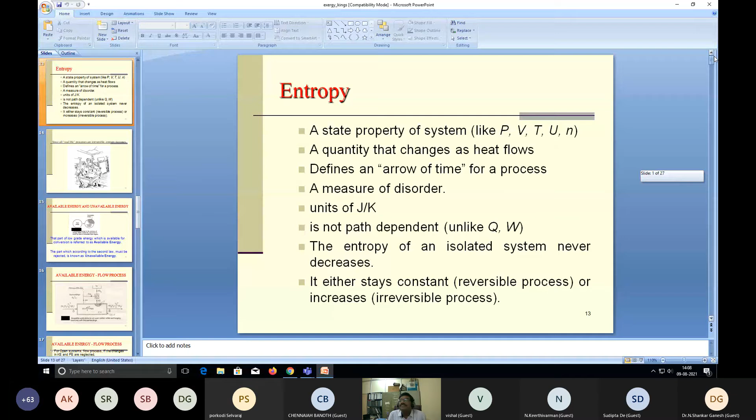Let's proceed. The topic is the fundamentals of Exergy and its role in thermal design and optimization. This was the topic given by the organizers, and I tried my level best to modify this lecture to suit your requirements and to continue for further lectures given by other speakers from day 2 onwards, since most teachers from the second day onwards will give inputs related to how it has to be applied for different practical applications—power cycles, refrigeration cycles, thermodynamic systems, equipment, and so on. For all these components, second law analysis has to be incorporated so that optimization and design will be better.

So the contents of the present lecture will go this way. Initially, I will discuss what a thermodynamic model is—all the speakers in the next 5 days will be discussing this thermodynamic model only. I'll try to show where Exergy analysis fits in and how it has to be taken into account for the analysis. Then I'll start with the limitations of the first law, and before going to the second law, how Exergy came into existence for understanding. Then what is the quality of energy, and what is the need to understand this quality.

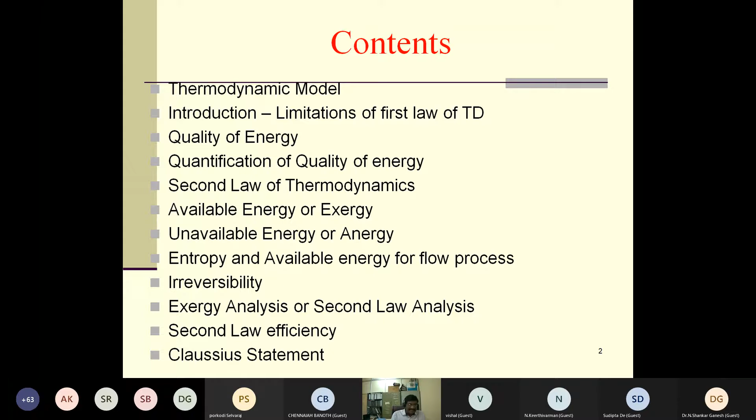Now we come to the thermodynamic analysis or thermodynamic model of power cycles. Whenever you want to analyze, design, or study any thermal system—gas turbine power plants, steam turbine power plants, internal combustion engines, and other power generating systems—for the time being, let us not discuss power consuming devices, and let us focus mainly on power generating devices. All these power generating devices work based on power cycles, as you might know.

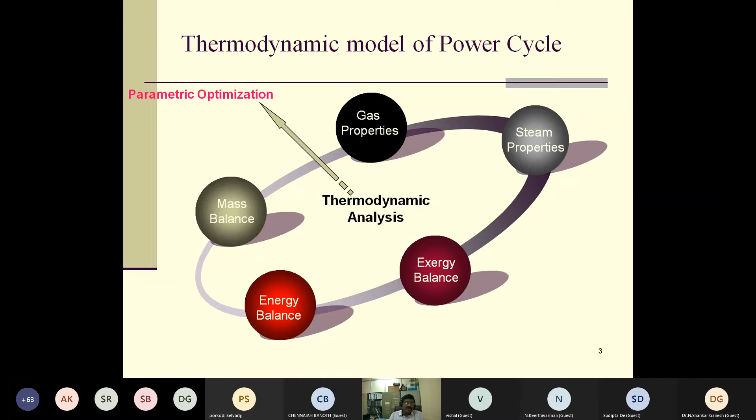Then you can do your parametric optimization either for combined cycles or different triple power cycles, tri-generation systems, or any new advanced topics like gasification process or clean coal technologies. A lot of thermodynamic cycles are nowadays available which are to be optimized and made practically implementable for the future power generation industry. With this intention, I'll try to start my lecture.

Let me give a brief introduction before going to exergy. I don't want to completely discuss the basics of thermodynamics, since whoever the participants are, majority already might be knowing the basics of thermodynamics and the first law. I will start my lecture from the basis of the first law and its limitations, how to overcome these limitations, how the second law can be applicable, and its importance. Finally, I would like to touch upon entropy generation and how it is useful for making second law analysis, and so on. I will try to extend this for today's lecture.

Let me take the introduction. I will give the statement of the first law of thermodynamics, which you might have already studied.

The first law of thermodynamics states that energy can neither be created nor be destroyed, but it can be transformed from one form to another. Because energy transformation exists, and because we need to make energy transformations according to the requirements of our practical applications, this thermal engineering has come into existence.

You need to study about all thermal equipment. If energy conversion is not necessary, you don't require this thermal equipment. So since energy conversion is required, when you try to convert energy from one form to another, the first law plays a vital role.

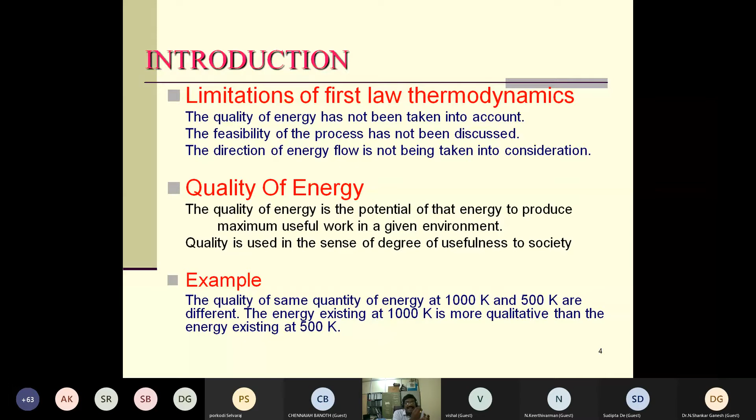Now let me check the quality of energy. We try to conduct a small test for the energy sources from where you are getting that energy, and we will try to see how much capability of transformation it has, for testing.

I am connecting the energy sources to a reversible heat engine. Why a reversible heat engine? Basically all reversible heat engines have the maximum efficiency, and also all reversible heat engines have equal efficiency for the given temperature limits. This is the statement given by Carnot, and based on that, reversible heat engines will definitely give the better or maximum work output.

From the first energy source, you know the equation for calculating reversible work for any reversible heat engine, which is Q1 into 1 minus T2 by T1. This is a standard equation known to all of you, where T2 is the sink temperature and T1... Q1 is the heat tapped from the source. Now, if you give inputs to this equation from the first energy source, if you tap 1000 kilojoules of energy, you get 700 kilojoules of work.

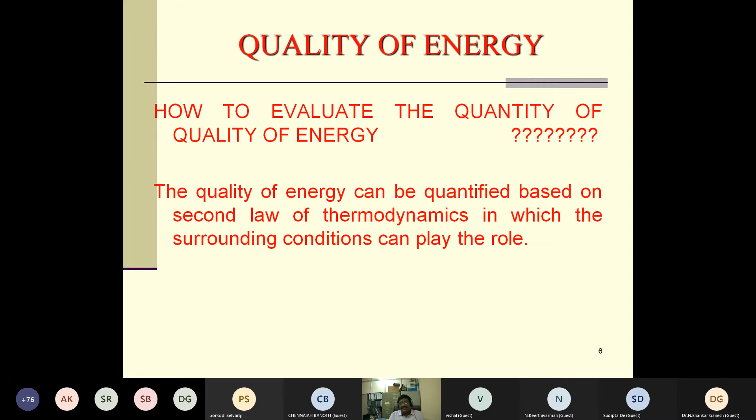The quality of energy can be quantified based on the second law of thermodynamics, in which the surrounding conditions will play the role. The environment and surrounding condition will play the role, and the second law of thermodynamics will come into existence.

Now first I will try to discuss briefly about the second law, then how it can be linked to your quality. The second law of thermodynamics basically considers the following points: it recognizes the quality of energy.

Even the same quantity of heat at different temperatures will have different qualities. There is a gradation between types of energies. It will help us to grade based on direction of energy transfer and conversion capacity. Energies can be graded.

It is also called the law of degradation of energy, since practical processes result in degradation of energy. Slowly, as the processes go on, the quality of energy will be degraded.

It also introduces the concept of entropy. The entropy has been brought from the second law. However, it was being discussed before the first law, but they did not know that was entropy.

When you come to the first law of thermodynamics, we know that energy transformations are of two forms from a thermodynamic point of view: work transfer and heat transfer. For drawing on the PV diagram, for work transfer, integral PdV will be the work transfer, and for getting the heat transfer, integral T dx. X has been given as an unknown parameter as long as we discussed about the first law of thermodynamics.

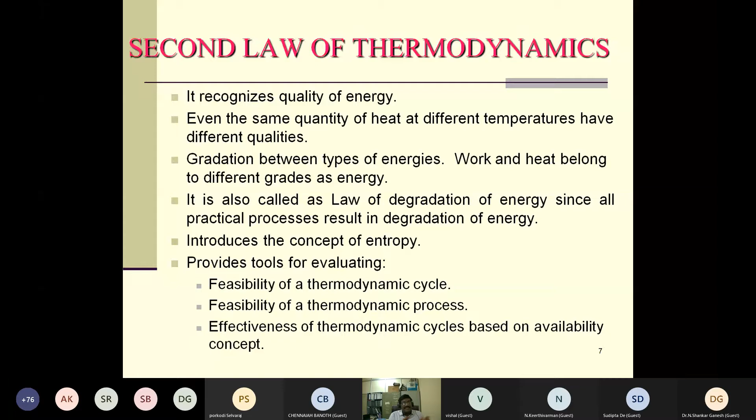But after the second law of thermodynamics, people got the importance of the second law and entropy, and that has got its own prominence, and it has been introduced into our content. Now we will say the second law of thermodynamics, what does it say?

It has been given in two statements: one is the Kelvin-Planck statement, the other is the Clausius statement. The Kelvin-Planck statement says it is impossible to construct a heat engine operating in a cycle to produce shaft work by exchanging heat with a single thermal reservoir.

So we may not be in a position to construct a heat engine which can generate work, because heat engines are generally used for converting heat energy into mechanical work. While converting with a single reservoir, it is impossible.

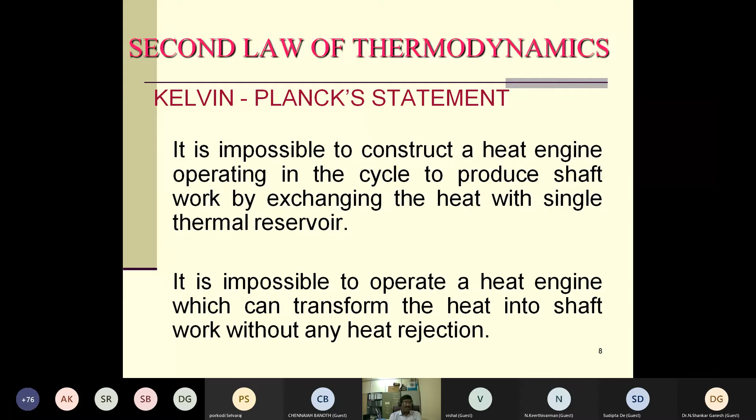You have to have one reservoir for heat tapping and one reservoir for heat rejection. In other words, it can be said that it is impossible to operate a heat engine which can transform heat into shaft work without any heat rejection. Such a fictitious machine cannot be made.

So here I have given the same Kelvin-Planck statement in the heat engine form. Here you can see the reversible heat engine. It is having better efficiency, and the source temperature is being taken as T or any other temperature.

I try to tap 1000 kilojoules of energy and connect it to a reversible heat engine. If you are able to convert this 1000 kilojoules into 1000 kilojoules of work, complete conversion, in this case the quantity of heat rejection is 0. That means this is the Kelvin-Planck statement which is impossible to construct.

The violation of the Kelvin-Planck statement would become PMM2, that is the perpetual motion machine of kind 2. That means without heat rejection, it is impossible to construct a heat engine which can transform heat energy into mechanical work 100%, which is practically impossible.

Now we may be getting the doubt: what is the link between this quality of energy and the second law of thermodynamics, or the Kelvin-Planck statement? How can this Kelvin-Planck statement take into account the quality of energy? I will try to go back to the engines shown here earlier.

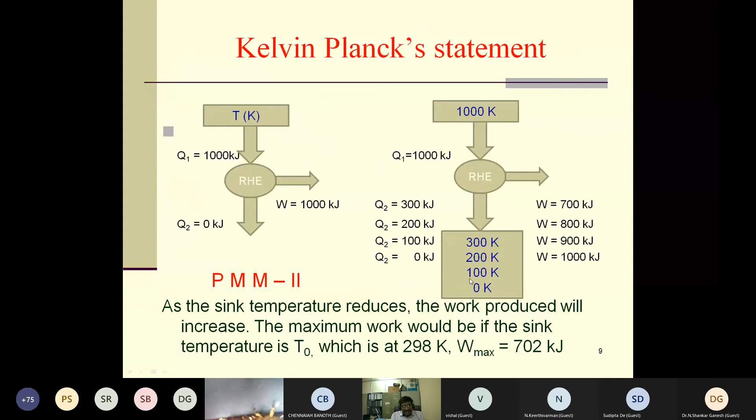It is a reversible heat engine. Whatever maximum work output you get is equal to 1 minus the sink temperature, which I'm maintaining as T0. So 1 minus T0 by T1, into Q1, is called the quantity of qualitative energy, or exergy. This is the major point to be noted. Whenever we have Q1 quantity of energy, don't feel that energy has the potential for conformation or transformation—when it comes to practicality, this is a composite property.

If T1 is equal to T0, let us say the source temperature is equal to the sink temperature, even though we have an enormous quantity of Q1, the exergy value is 0. The quantity of qualitative energy is 0 if it exists at T0. So 1 minus T0 by T1 is the efficiency of a reversible heat engine working between the temperature limits of T1 and T0.

That is the beauty of exergy—its quality is absolutely 0. The quality of energy is 0 at the dead state. The energy is qualitative above and below the dead state. If all the thermal energy reaches the dead state, that means thermal death is achieved.

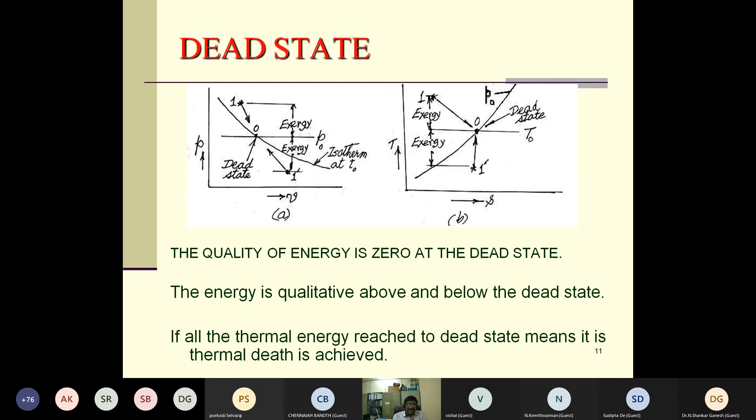Once we understand the available energy or exergy in a given energy component, that is the quantity of qualitative energy, it is our responsibility to know the unavailable energy, or anergy. As I said, if there is no heat rejection, there is no unavailable energy - that is impossible, which I call PMM2. There is always a certain quantity of heat rejection, which we call unavailable energy or anergy. Some heat must be rejected - the minimum amount that must be rejected, not just rejectable - while transforming heat into work is named unavailable energy or anergy.

Once after understanding this available energy, I'll come back again after discussing irreversibility. Now I need to define one more term which has a lot of prominence in understanding the second law of thermodynamics or exergy analysis - irreversibility. Irreversibility is defined as the difference between maximum work and actual work. So far we discussed what is the maximum potential or maximum capability for conversion, which I call maximum work or available energy. When it comes to practical conditions, we get the actual work. The difference between these two we call irreversibility.

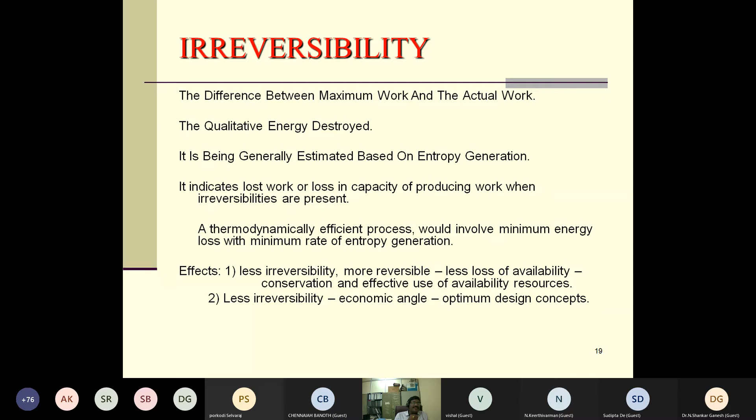Now we'll go to estimation of qualitative energy. I will give the loss of qualitative energy or irreversibility. As per our definition, energy will have two components, exergy and anergy.

Out of exergy, we are losing a certain quantity of energy, which we call irreversibility. That irreversibility, anyway, I don't want to discuss these basic equations and relations which anybody can understand from the textbook, but the physical concept: the available energy or exergy for the flow process can be calculated based on enthalpy and entropy.

Specific enthalpy and specific entropy will be the input parameters for the estimation of your W max, or available energy, or exergy, or its capability.

When it comes to W actual, that is your first law. When you say the first law of thermodynamics, the specific enthalpy difference will be equal to your actual work, W actual. Enthalpies are sufficient to make your first law analysis.

For making a second law analysis, enthalpy as well as entropy in combination you need to use. So W max for the open system or flow process and W actual, based on the difference between these two, will come the irreversibility or loss of qualitative energy which is occurring, that is equal to T naught into delta S, S2 minus S1. That S2 minus S1, I can call delta S generation.

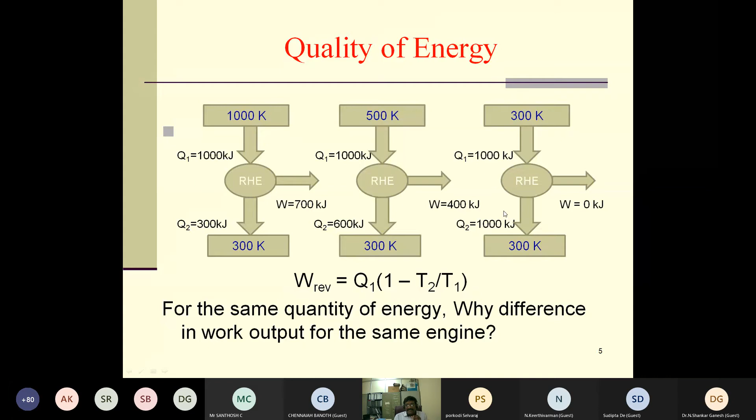That means in the case shown here, complete heat rejection exists - 1000 kilojoules - and you are unable to get even zero work output from the system. It means the entropy is being maximized. Once entropy is maximized, the quantity of qualitative energy has become zero. One should not reach that level.

So when do we say that the student's entropy generation is maximized? He gets 0 marks in the class. If after the exam his marks are 0, it means his entropy is maximized and his irreversibilities are more, and his capabilities are lost. We can simply say he is incapable of becoming the engineer until he again improves his quality by minimizing his own entropy.

So whenever we do the second law analysis or exergy analysis, entropy will have a vital role. By taking entropy and other thermodynamic properties into account, we will try to evaluate a composite property called exergy. Once the exergy is calculated, based on the exergy we will try to evaluate what will be the irreversibilities of the components. Once irreversibilities are known, you have to focus on minimizing those irreversibilities so that the process parameters can be improved and performance or output can be better.

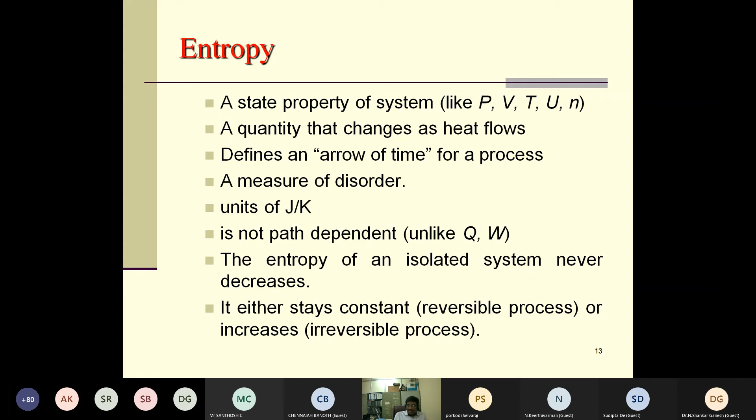So this is briefly about irreversibility, entropy, and so on.

Once after knowing the significance of exergy, energy, and irreversibility, entropy generation, all these are having a close relation. Energy will have certain components, that is exergy is the useful work, and the useless work is the anergy. In that exergy, irreversibilities are existing, and those irreversibilities are due to entropy generation. So based on entropy generation, we'll try to evaluate the irreversibilities, and based on the irreversibilities, we'll come to know how much quantity of qualitative energy is destroyed in the system.

So when you come to the second law analysis, or exergy analysis, how to do it? Because the concepts are clear now. Exergy is known, irreversibilities are known, energy is known, how the surrounding plays the role, that is also known. How the compound property or composite property, based on enthalpy and entropy, how availability function can be calculated, because based on the definition, I will show here.

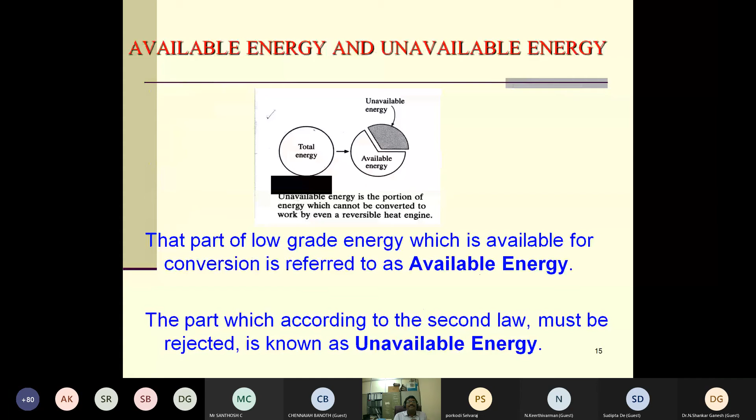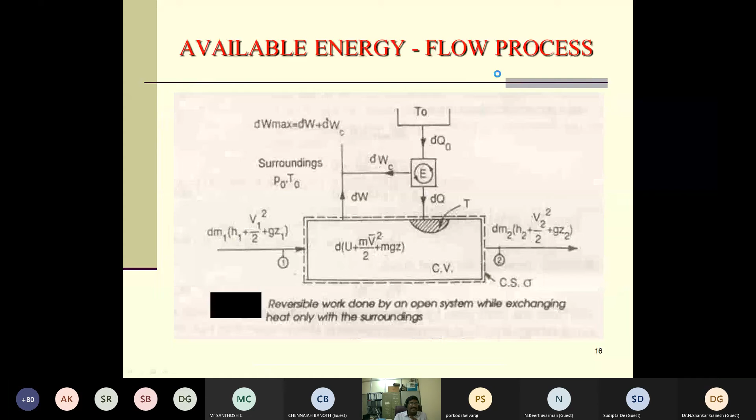So availability or availability function will be a composite property, or exergy, depending on the given condition. So whenever you want to do the exergy analysis, energy analysis, which is already known, when it comes to exergy analysis for any power cycle, either you take Kalina cycle, Brayton cycle, Otto cycle, diesel cycle, dual cycle, any of the cycles, first you identify the components, identify the state points 1, 2, 3, 4 and so on. Those points will be considered as the entry point and exit point for each and every component.

Those are being represented by the thermodynamic coordinate system, which is well known to all of you. All the students, mechanical engineering undergraduates, postgraduates, and mechanical teachers, they know pretty well how to draw this thermodynamic diagram on PV and TS diagrams, with entry points and exit points. And each and every point will have its own thermodynamic properties.

When it comes to thermodynamic properties, we come to know that pressure, volume, temperature, internal energy, enthalpy, entropy, Helmholtz function, and Gibbs function - these are the 8 thermodynamic properties. If you know any 2 of them, the remaining can be calculated based on the basics of thermodynamics. And we presume that before going to the analysis of any power cycle or any system, we know the thermodynamic properties. What we need to do is evaluate the thermodynamic properties of specific enthalpy and specific entropy at all the state points.

Enthalpy and entropy values - if I take steam properties, steam tables are already available, and depending on its condition, we can get those values directly. For gas, we know the relations based on the specific heats, and you try to calculate those values. Or nowadays, ready-made subroutine programs are available for air properties, gas properties, steam properties, refrigerant properties and other things - those values can be directly downloaded. Whenever you want to do the exergy analysis, you must know the enthalpy and entropy. These 2 are the crucial parameters which are required at all the state points of the system.

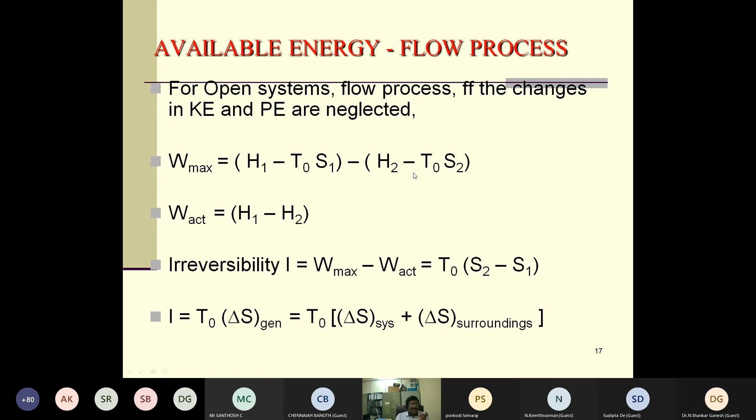Once you know the enthalpy and entropy, the procedure I will discuss here. The availability function has to be evaluated at each state point of the cycle based on enthalpy and entropy. As already mentioned, at each and every state point, you know the values of enthalpy and entropy. Once you know the enthalpy and entropy, you calculate the availability function for the flow process as H minus T naught S - enthalpy minus T naught into S. We call this the availability function. H1 minus T naught S1 will be the availability function at state point 1. H2 minus T naught S2 will be the availability function at state 2.

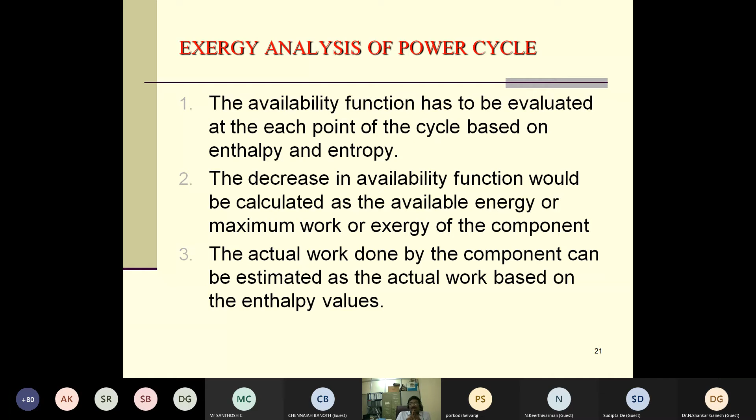So whenever you follow the exergy analysis for a cycle or a system, you evaluate the availability function at each state point based on enthalpy and entropy. Once you know the composite property, the availability function at the state points, the decrease in availability function would be calculated as available energy, or maximum work, or exergy of the component. So whatever the difference between these 2 is will be its maximum capability. So whenever you want to do the exergy analysis, first you try to calculate its maximum capability.

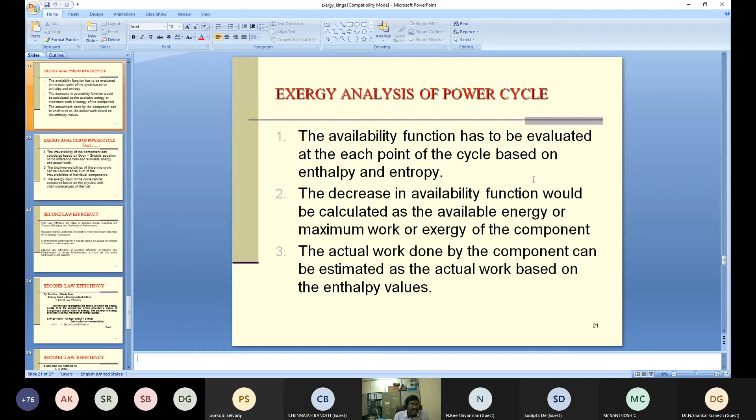The next step: the irreversibilities of the component can be calculated based on the Gouy-Stodola equation that I have given, T naught into delta S generation, which is equal to T naught into delta S system plus delta S surroundings. Already I have given that input. Based on that, you can also calculate irreversibility. Either W max minus W actual is one way of calculating irreversibility, or the Gouy-Stodola equation is another way. Either way you can calculate and compare.

What you'll know from here is what the loss of qualitative energy occurring in each and every component is, known from the irreversibility. Exergy is one part, energy is another part, but the crucial part is irreversibility. If you know the irreversibility, the loss of qualitative energy occurring, and if you are able to minimize this irreversibility, definitely the system will work efficiently and the components will have better efficiency. The total irreversibilities of the entire cycle can be calculated as the sum of all the individual irreversibilities of each component — that is the beauty of second law analysis.

When you come to first law analysis, you will only know the net work output by heat input, trying to calculate the efficiency of a system, but we do not know exactly where the loss is occurring. When it comes to second law analysis, each and every component is thoroughly verified by knowing its own irreversibilities. Each component will reveal why the loss is occurring and what the irreversibilities are, and you try to work out how to minimize those irreversibilities for future design and output.

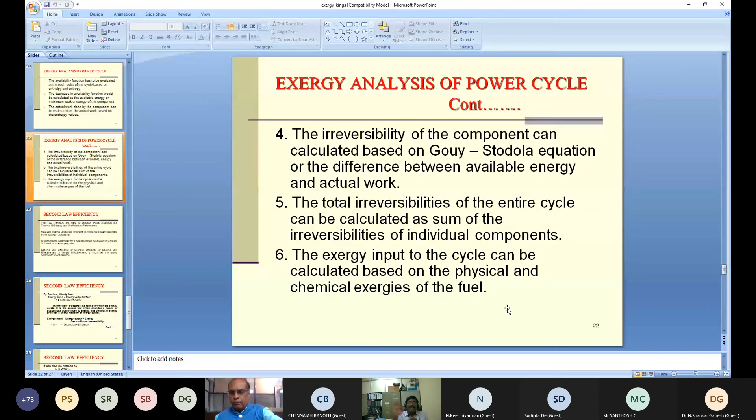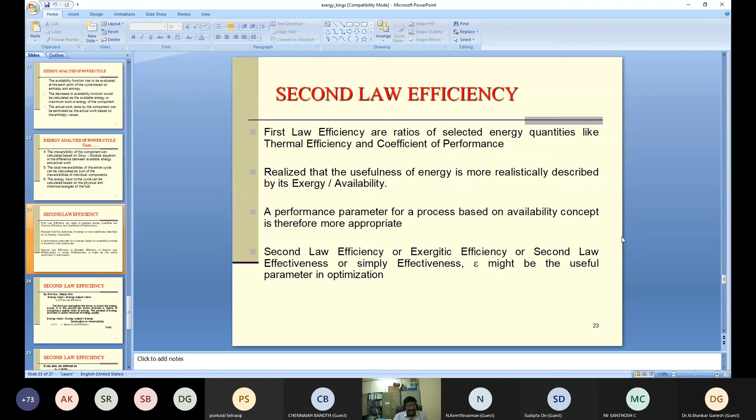The exergy input of the cycle can be calculated based on the physical inputs — we calculate how much quantity of exergy is input into the cycle from the energy. Once you know the exergy input and irreversibilities, the second law efficiency can be calculated. The second law efficiency has been defined in many ways, based on exergetic output by exergetic input, and also by using Carnot efficiency. Different relations are available for calculating it.

To help you understand the importance of the second law: in first law thermodynamics, for a steady flow process, energy into the system is equivalent to energy leaving the system. According to the first law, energy input minus energy output is equal to zero. You are not getting any information from any component based on the first law. But when it comes to the second law, exergy input — how much quantity of capable energy is flowing into the system — and exergy output — the quantity of capable energy coming out — the difference between these two becomes irreversibility, or exergy destruction, or qualitative energy destroyed.

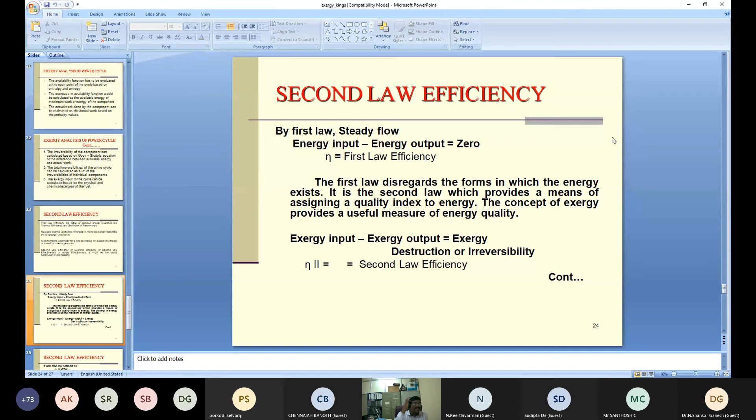So this gives a lot of importance: in the first law, energy input minus energy output equals zero, whereas the second law gives us exergy input minus exergy output equals irreversibility or exergy destroyed. In this way, the second law efficiency has been calculated, and based on the second law efficiency performance, we will come to know its significance and importance.

So with this, I wanted to give the inputs related to energy, exergy, how it is being quantified, what the role of dead state is, and how entropy is an input in converting a reversible system into an irreversible system, and so on. How to do the second law analysis has been given in detail for the participants.

Just for understanding's sake, I will discuss the Clausius statement so that the entire second law analysis has been completed. It is impossible to construct a device which, operating in a cycle, will produce no effect other than transfer of heat from a cooler body to a hotter body — or, heat will not flow by itself from a lower temperature body to a higher temperature body without any external energy source.

Energy will not flow itself from lower potential to higher potential. When you say hot body to cold body, heat will flow on its own from higher temperature to lower temperature. But if you want to reverse that process, to transform heat from lower temperature to higher temperature, you need to expedite some quantity of work - this is how the refrigerator has come into existence based on the Clausius statement. So whenever energy transfer occurs from lower potential to higher potential, if you want to reverse the natural process of transformation from higher to lower potential, you need to expedite some quantity of work.

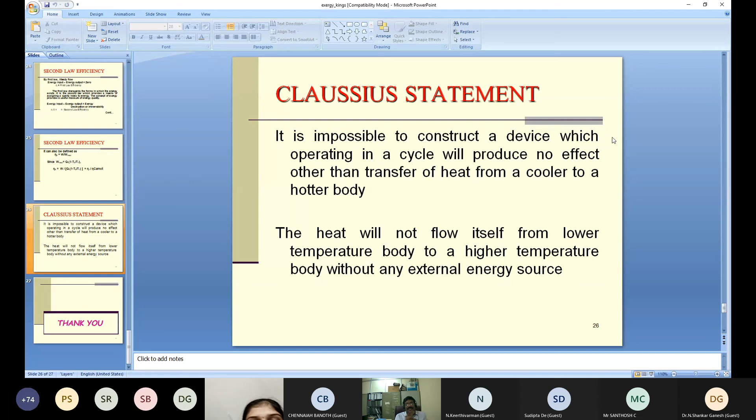Use the time effectively and do your duties comfortably and do better. So with this, I would like to conclude my session.